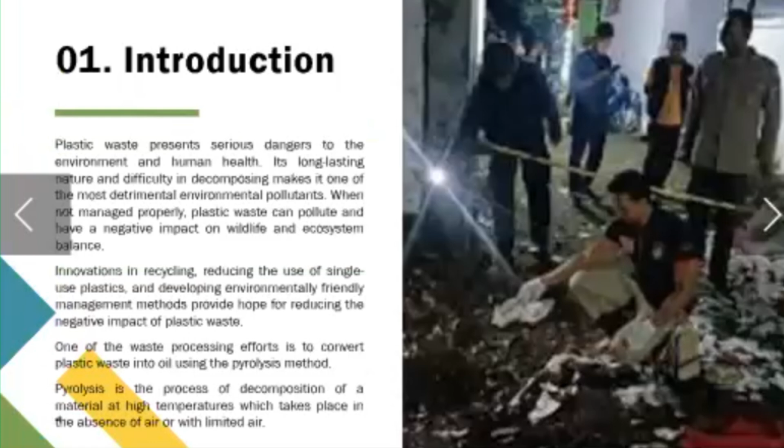The agenda for today's presentation is: I will present first the introduction, background to the problem, then the method, then research results, and then the conclusions. Let me first present the introduction of the problem.

As we are all aware, plastic waste presents serious dangers to the environment and human health. Its long-lasting nature and difficulty in decomposing makes it one of the most difficult and detrimental environmental pollutants. When not managed properly, plastic waste can pollute and have a negative impact on wildlife and ecosystem balance.

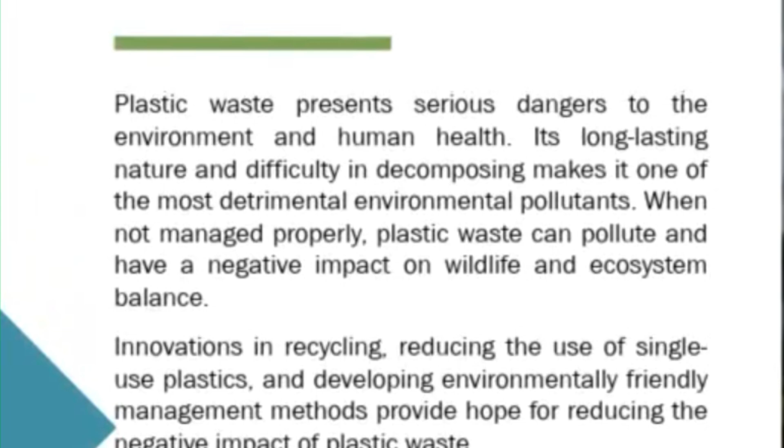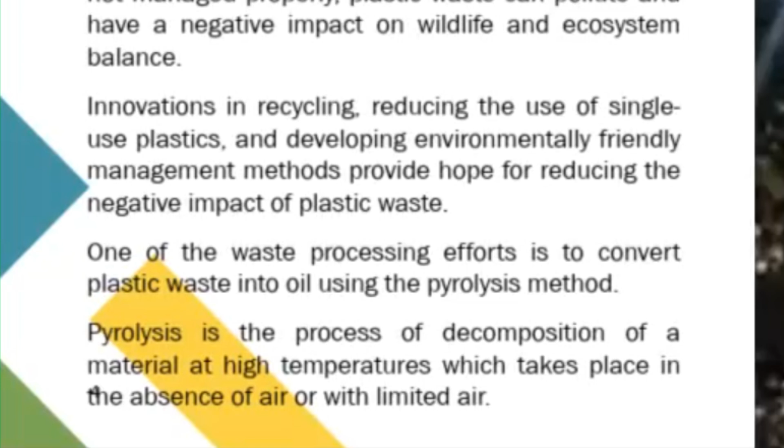Innovations in recycling, reducing the use of single-use plastics, and developing environmentally friendly management methods provide a hope for reducing the negative impact of plastic waste. One of the waste processing efforts is to convert plastic waste into oil using the pyrolysis method. Pyrolysis is the process of decomposition of material at very high temperatures in the absence of air or with very limited air.

So based on the background, the following problems are addressed: how to process plastic waste to fuel oil through the pyrolysis method so as to reduce plastic waste from accumulating so that it cannot harm the environment. The concept of fuel from plastic waste emerged as an interesting solution. The process of converting plastic waste into liquid fuels or synthetic fuels has been a concern because it can reduce the amount of plastic waste polluting the environment while creating alternatives to fossil fuel.

However, there are a number of challenges in the implementation of this technology. First, the efficiency of the process of converting plastic waste into fuel still needs to be improved in order to compete with fossil fuels in terms of cost and performance. Secondly, it is necessary to consider the environmental impact of such conversion processes, including greenhouse gas emissions and waste resulting from the process.

Nonetheless, the development of fuels from plastic waste has great potential to address two major problems at once: environmentally damaging plastic waste and dependence on fossil fuel. With continued research and innovation, this technology could be an important step on the road to a cleaner and more sustainable environment.

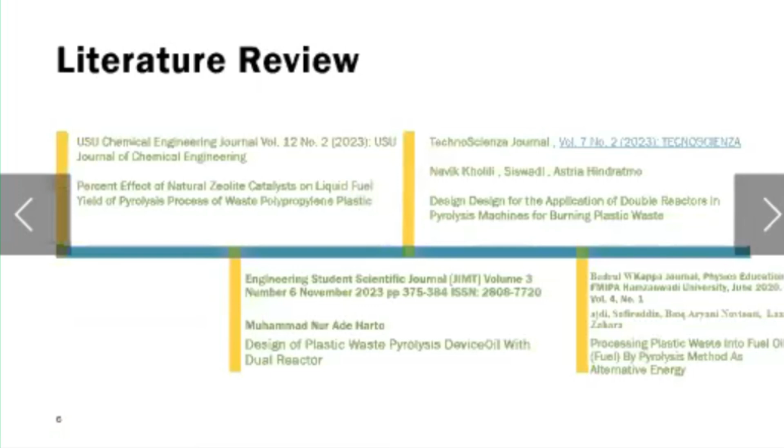Based on this background, the important question is how to process plastic waste to fuel oil through pyrolysis processes so as to reduce plastic waste from accumulating so that it cannot harm the environment. In order to achieve this goal, we studied several research papers which have been addressing this problem, and we came up with the method shown here.

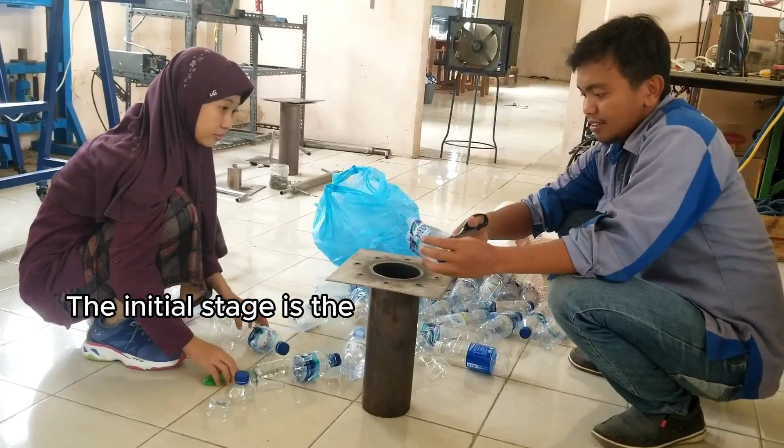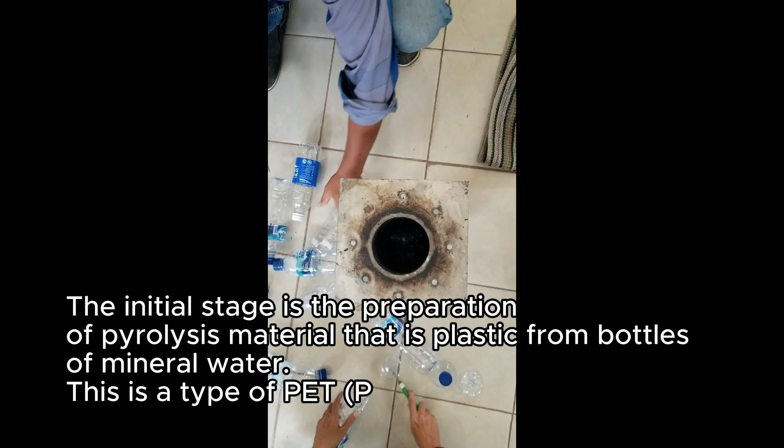The initial stage is the preparation of pyrolysis material, that is plastic from bottles of mineral water. This is a type of PET polyethylene terephthalate plastic that is abundant around us and is easy to recycle. The next step is to insert pyrolysis material into the reactor.

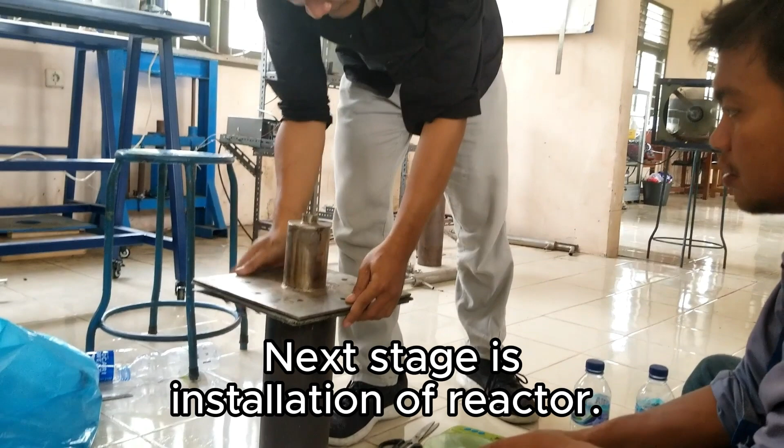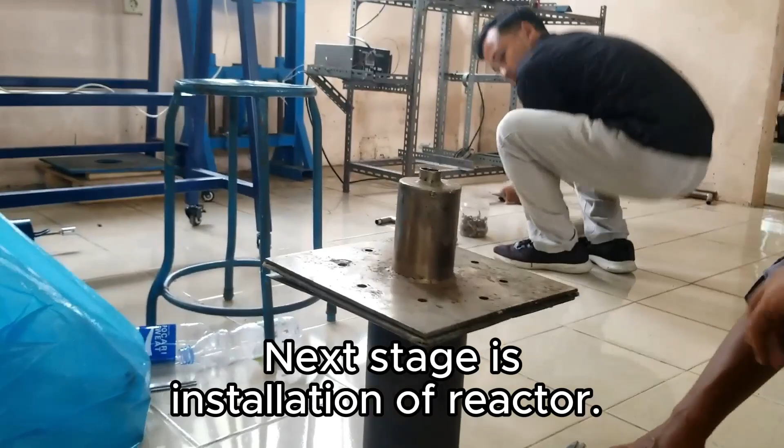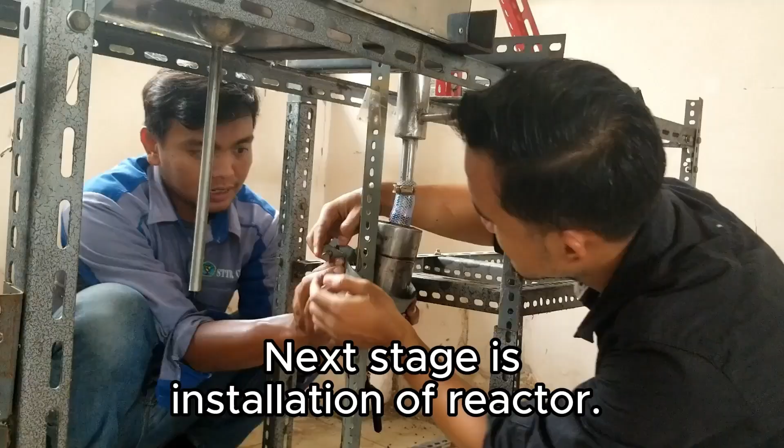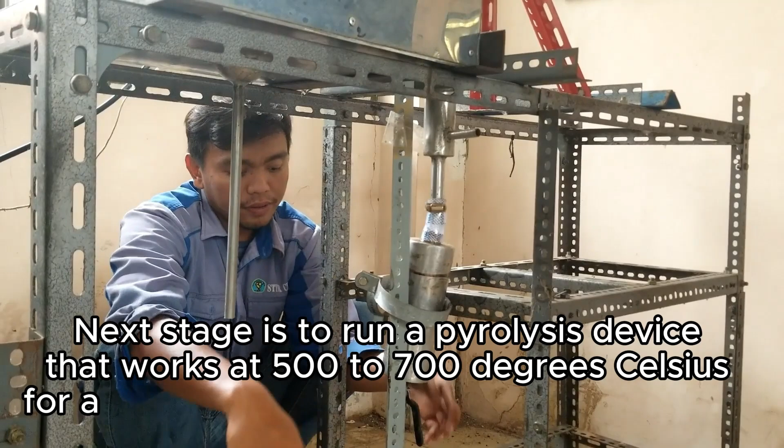Next stage is installation of the reactor. Next stage is to run a pyrolysis device that works at 500 to 700 degrees Celsius for about 4 hours to be able to produce fuel oil.

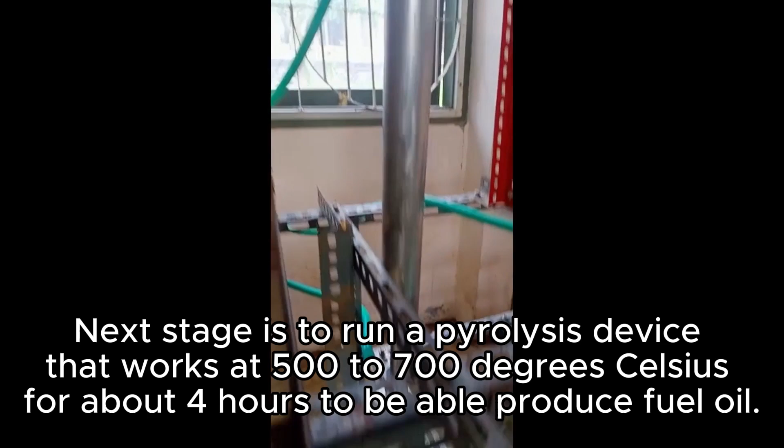After approximately 4 hours, 270 milliliters of oil is produced from 350 grams of plastic, so that 1 kilogram of plastic will produce as much as 771 milliliters of oil. So I will present now the results and discussion of our research.

It is well known that at a temperature of 100 degrees Celsius, polypropylene and HDPE plastics do not produce oil. This is because the plastics do not undergo the melting phase of either PP or HDPE plastics, because their melting points are 168 degrees and 138 degrees C for PP and HDPE plastics. So in order to produce oil, the plastics should be heated well above their melting point so that they can undergo a decomposition process.

Decomposition is a state in which the plastic will easily flow and the structure will undergo decomposition. As for the properties of PP and HDPE plastics, they are strong, hard, semi-flexible, and the wax surface is still the same as the state after heating, where the residue is difficult to clean and the surface of the residue is waxy and hollow on HDPE plastics.

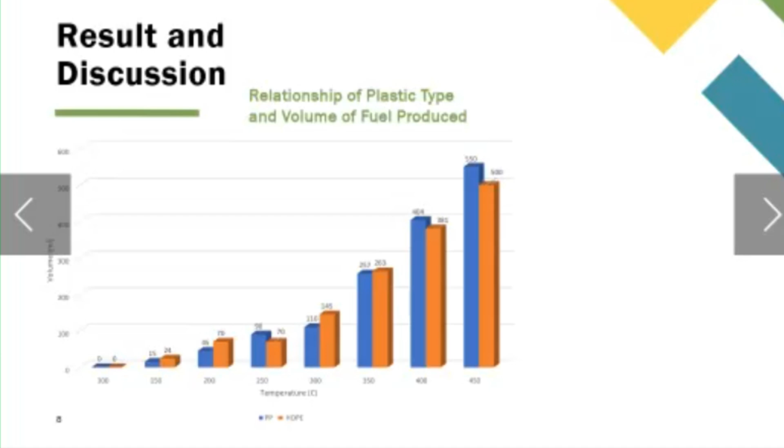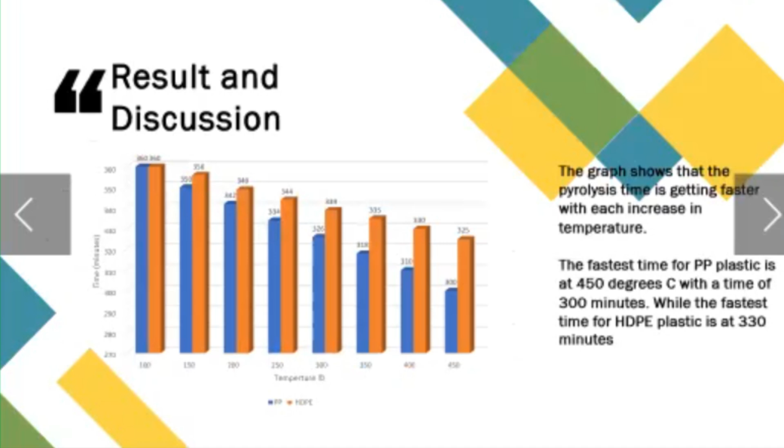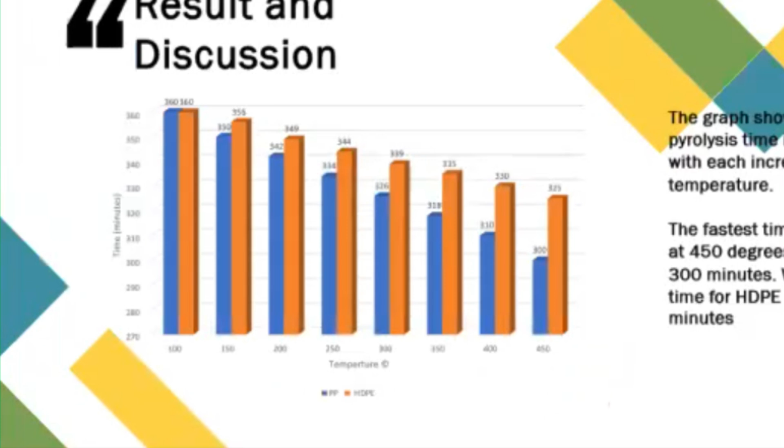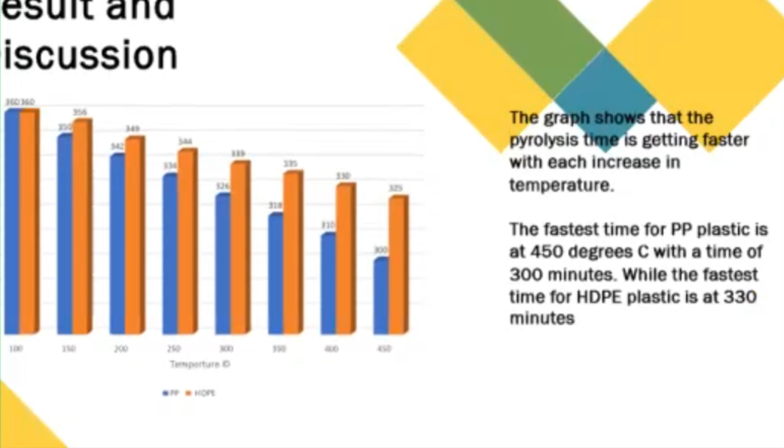Here another graph is shown, which shows the pyrolysis time versus the temperature. Pyrolysis time is the length of time the pyrolysis process takes in processing plastic waste into pyrolysis oil. The duration of the pyrolysis process is calculated using a stopwatch from the start of heating the reactor containing plastic waste until the end of the pyrolysis process, marked by no gas being produced.

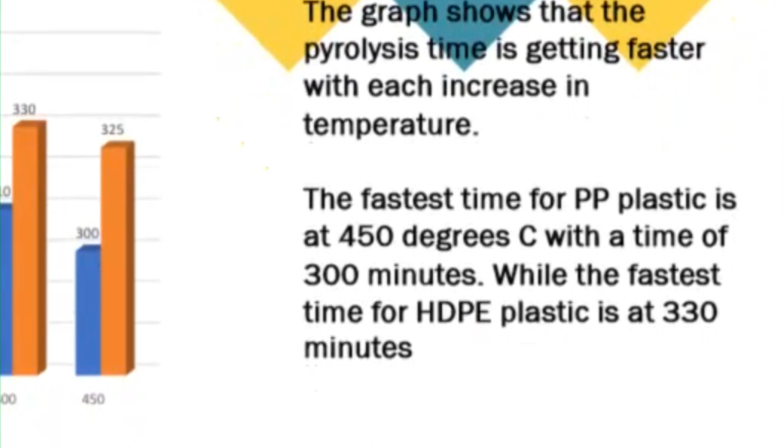The graph shows that the pyrolysis time is getting faster with each increase in temperature. The fastest time for PP plastic is at 450 degrees Celsius with a time of 300 minutes, while the fastest time for HDPE plastic is 330 minutes.

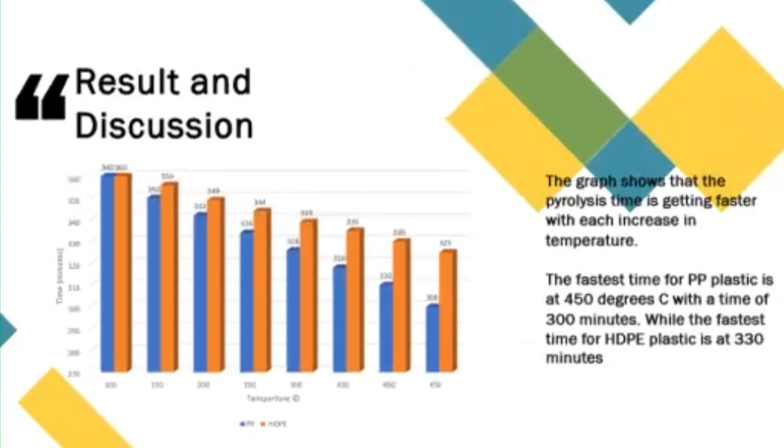So, in conclusion, we could conclude that the reactor temperature influences the volume of oil produced and the time of pyrolysis, because the higher the temperature, the more oil is produced, and the pyrolysis time will end more quickly. So, in simple words, we can say that higher temperature would be beneficial for the pyrolysis process. But on the other hand, producing higher temperature would require more energy.